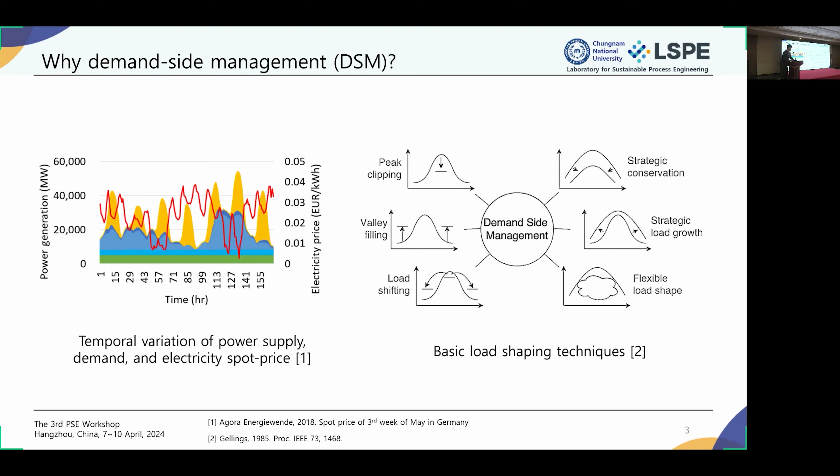For instance, during the time when the demand is high, some players in the power exchange market could reduce their power demand, or they could shift their demand to the period when the demand is not really much. There are also different types of strategies to employ the DSM.

So there are two representative cases where the DSM could be beneficial. The first one takes place in the balancing market. I took this figure from this website, where the gauge indicates the current frequency of the European power grid. It should stay around 50 Hertz, as many of you already know. But if there is more demand or less demand, then this arrow moves up and down.

So in order to avoid much deviation from our standard level, someone needs to reduce their power load, or someone needs to increase their power generation, or vice versa. So if you participate in this balancing market, by increasing or decreasing your demand, you can take the financial incentive because you contribute to the stability of the power grid.

That's one opportunity. Another opportunity takes place in the spot market. This is a process flow diagram of an air separation unit, which is the most representative system in the case of the application of DSM. There is a main compressor that pressurizes air in order to separate it into nitrogen and oxygen. It consumes a huge amount of electricity in the industrial sector.

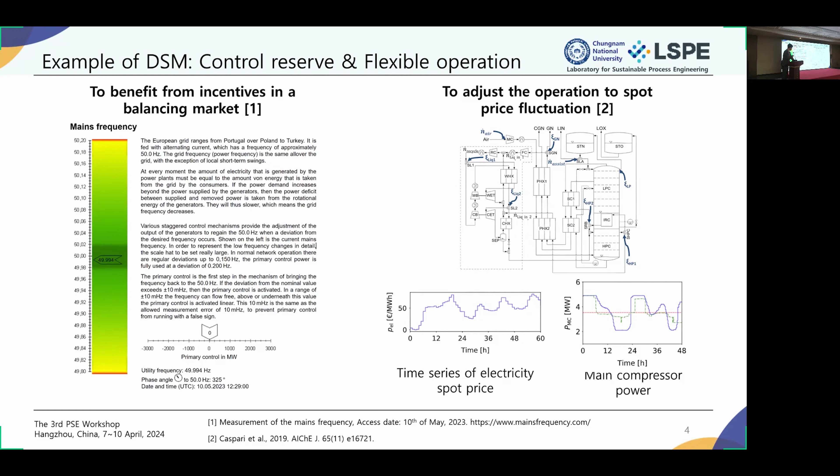On top of that, in academia at least, many people have tried to apply this DSM to various industrial plants, such as the air separation unit I already introduced. Also chlor-alkali electrolysis is another representative kind of toy problem that has been investigated. Also, some investigated the application of DSM to desalination plants that change seawater to drinkable water. Also, the carbon capture plant was another interesting target for the DSM study, mostly led by researchers in Norway.

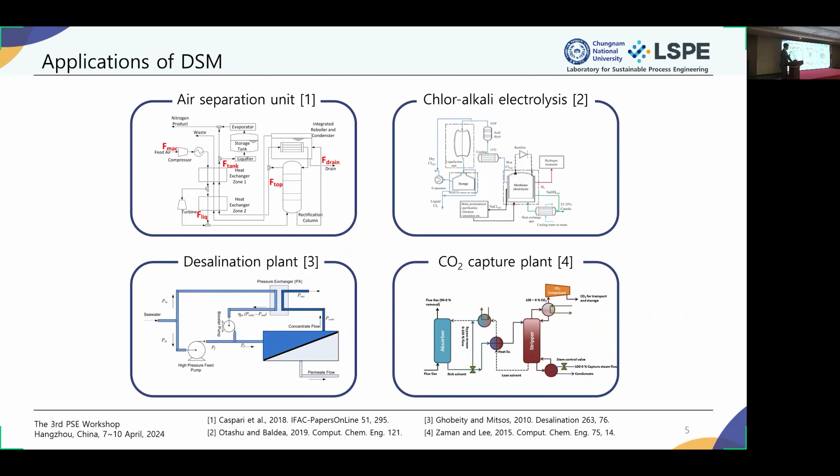Today's talk is mostly about the application of DSM strategy to three different electrolysis-based systems. The first is not just a simple chlor-alkali electrolysis, but one that employs switchability between two different operational modes. The second is an electrochemical CO2 reduction system that converts CO2 into valuable chemical products. The third is water electrolysis that produces hydrogen, but this is a really practical problem. Let me introduce these case studies one by one.

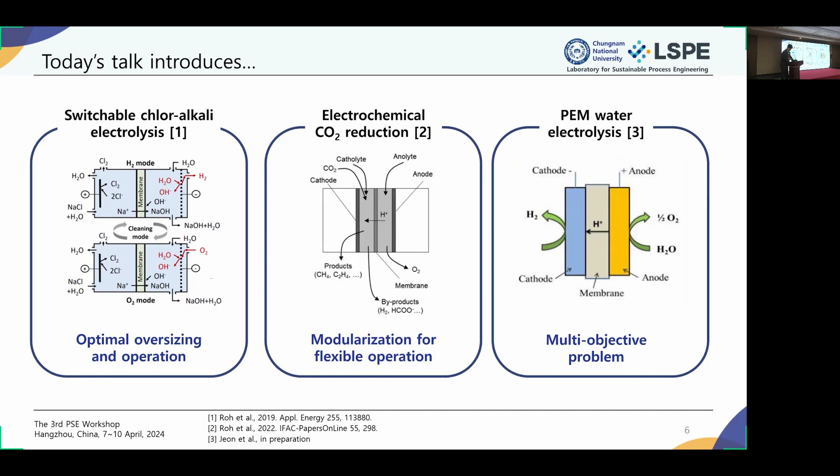This first work was done in collaboration with Professor Mitsos and also the industrial partner Covestro, when I did my PhD postdoc in Aachen.

Looking at this slide, the conventional chlor-alkali electrolysis is based on this scheme. It decomposes brine into chlorine gas, sodium hydroxide, and hydrogen as a byproduct when you apply around 3 volts of cell potential to this electrolyzer. This is the conventional way of making these chemical compounds.

As an alternative, we could also replace the cathode side with an oxygen-depolarized cathode. Then, with reduced cell potential around 2 volts, we can produce the same amount of chlorine and sodium hydroxide. But the difference is that we need to supply extra oxygen as raw material, and we don't have the hydrogen byproduct anymore. Looking at this graph, for the same amount of chlorine production, the conventional or hydrogen mode consumes around 33% more electricity than the oxygen mode.

My German industrial partner invented a novel cathode that employs bifunctionality, allowing us to operate this electrolyzer in both modes.

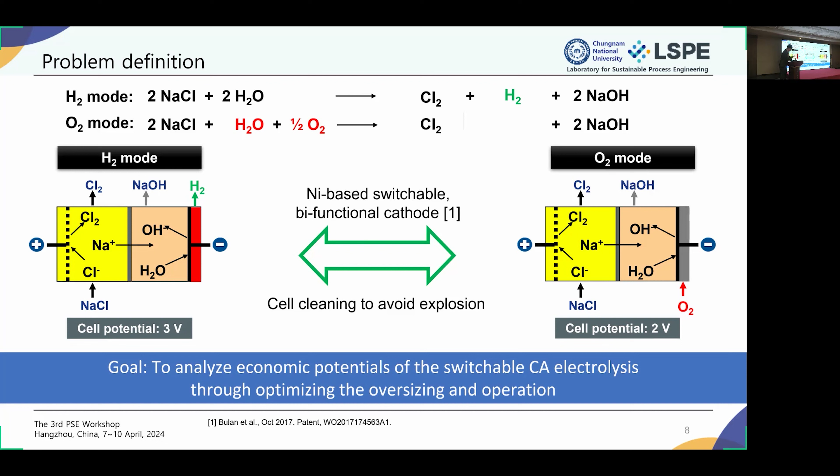So our goal for this program is to analyze the economic potential of this switchable chlor-alkali electrolysis through optimizing both the oversizing factor and the operation. It's kind of an integrated problem.

This slide illustrates how this concept operates. The electrolyzer can operate in one of three modes. If you want to change your operation mode from hydrogen mode to oxygen mode, we need to shut down our electrolyzer first and clean up with nitrogen gas, because in the cathode chamber, if you don't do that, oxygen and hydrogen meet each other and it may cause an explosion.

The industrial people never want such an occasion, so that's why we need to stop by at this clean mode. That may take less than 45 minutes.

We should also have a chlorine storage tank, because we need to guarantee a constant supply of chlorine to the downstream process. These downstream operators aren't interested in what we're doing upstream; they always require a stable supply of the intermediate products.

But the thing is, chlorine gas is a really dangerous gas. Therefore, the capacity of the chlorine gas storage is legally limited. The maximum duration for storage of chlorine is around 3 hours, according to my industrial partner.

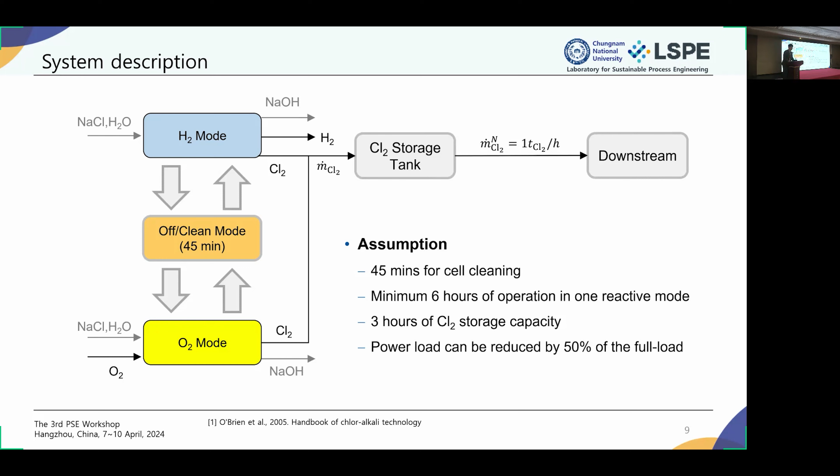So I formulated an optimization problem. Our goal is to minimize this hourly production cost, which is the sum of the operating cost saving and additional depreciation cost. The operating cost includes the cost of electricity and oxygen, and also the credit from the hydrogen byproduct. This next part is important, that's why I put an underline here.

Depreciation cost: in order to employ this switching operation, we are not able to do so with an existing chlor-alkali electrolyzer. We should do some retrofit, and that causes extra cost, which needs to be included in this objective function. So there's no free lunch.

There are many constraints, some highlighted with underlines. These transition constraints are really important. They include some binary variables, and also this production rate limit is influenced by the oversizing factor alpha. Here, alpha is an optimization variable too, which is independent of time, because as I told you at the beginning, my goal is to simultaneously optimize the oversizing and the operation.

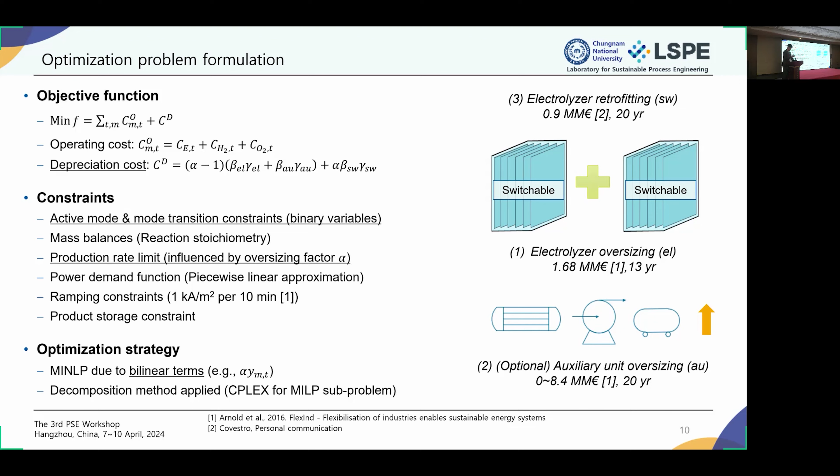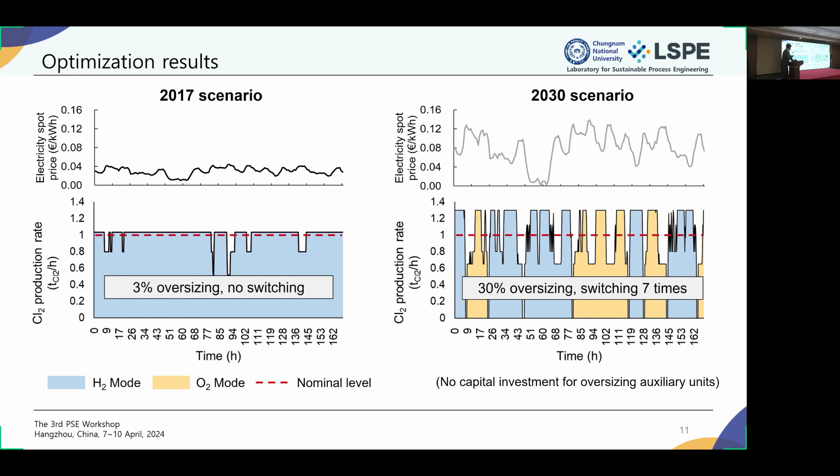Also, a bigger oversizing is found compared to the 2017 case. Then the question is whether this is really beneficial if we consider both operating savings and additional depreciation.

So I created two extreme cases. The first only requires the minimum cost for retrofitting the electrolyzer itself. The other extreme case is different: on top of the electrolyzer, we need additional cost to enlarge the capacity of the auxiliary units around it, because sometimes we want to increase production level, which requires additional capacity.

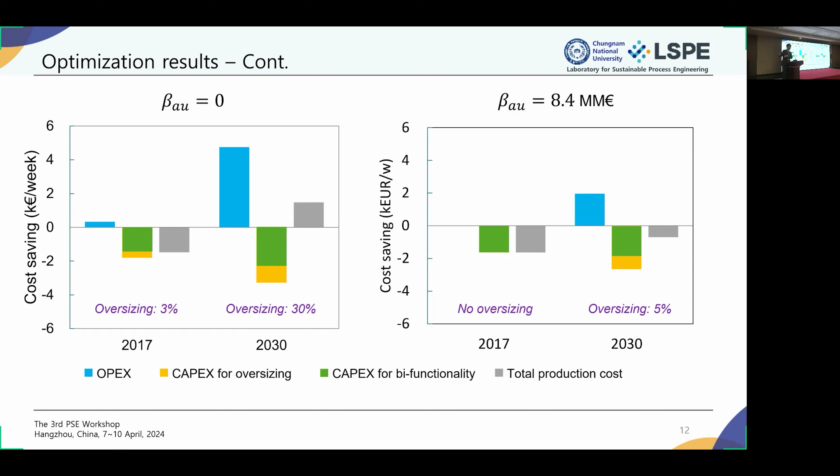Okay, now let me move on to the next case study. This one was done in collaboration with Professor Mitsos.

This one is a fairly new technology compared to chloralkali electrolysis, which is really traditional. This electrochemical reduction technology is still at very low TRL—I would say around TRL level 2 to 4.

The basic principle is that we reduce carbon dioxide by utilizing, hopefully, renewable electricity to produce valuable chemicals such as carbon monoxide, formic acid, ethylene, or ethanol.

But the problem with this technology is that it's too expensive, because of expensive materials and expensive equipment, but the biggest cost driver is the power cost—electricity cost—because of the huge overpotential.

There might be several solutions to overcome these challenges, but one of my solutions is to apply demand side management to this novel technology. Why? If we can adjust the production level of this new system to the fluctuation of electricity price, we could expect some financial benefit. But here are some challenges.

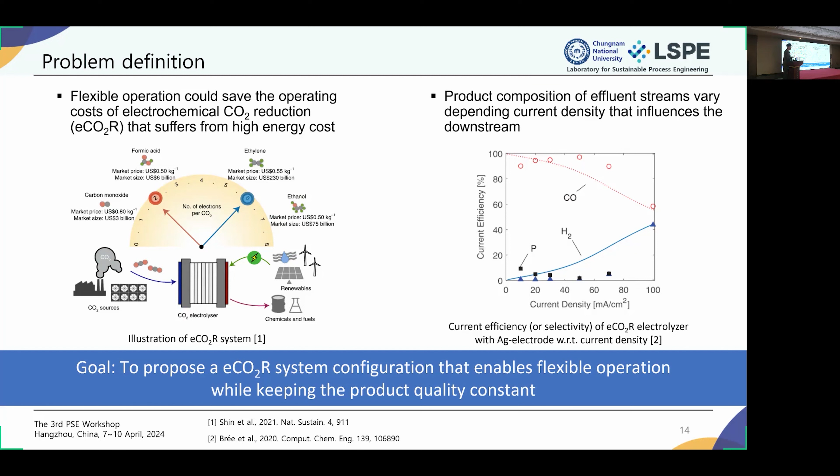So the goal of this case study is to propose an eCO2R system configuration that enables flexible operation while keeping the product quality constant. That was our problem.

Here's the basic idea: we modularized this eCO2R system. This idea was motivated by a conventional problem in industrial engineering called the parallel machine scheduling problem.

This problem involves an n number of identical machines. How should we allocate jobs to these identical machines? So we propose this concept of system configuration.

We divide the whole electrolysis system into small modules and make individual decisions. In this case, one module could produce a different amount of syngas than the others, but we impose a constraint that the composition of this mixed stream should always satisfy our product quality constraint. So while the product quality stays at a constant level, the total flow rate could differ.

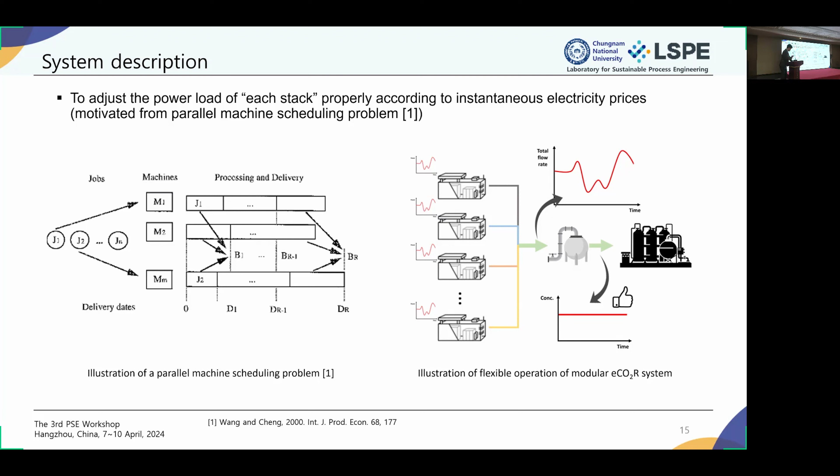Here is a schematic diagram of this modular eCO2R system. We supply carbon dioxide and water, and there are n number of sub-modules comprised of an electrolyzer and a CO2 separation unit that recycles the unreacted CO2. Then we put them together, with a storage tank that stores the products and guarantees constant supply to the downstream process.

In this case study, we consider a simplified reaction stoichiometry that produces hydrogen and carbon monoxide with a hydrogen-to-carbon-monoxide molar ratio equal to 1, suitable for Fischer-Tropsch synthesis. We also introduce several conditions that characterize the oversizing, number of stacks, time horizon, and so on.

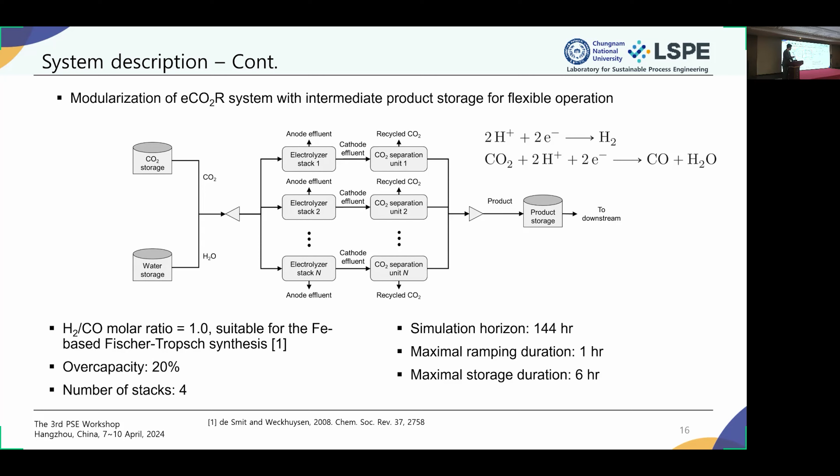So there are some key assumptions. For instance, we assume that there is no side product, and also unreacted CO2 is completely removed. And also we only consider the power demand for the electrolyzer only, because that's the major energy consumer.

Our objective is to minimize the power cost for the given time horizon. There are several constraints that should be included, and I'd like to direct your attention to the first two constraints, which are nonlinear functions. Typically when you solve the scheduling problem, we linearize the nonlinear functions.

But this time we try to solve the nonlinear scheduling problem as it is, to guarantee the accuracy of the solutions. Also, in order to avoid alternative solutions that arise from this parallel machine scheduling problem, we add a symmetry breaking constraint. And to solve this nonlinear scheduling program, we apply a wavelet-based grid adaptation algorithm, proposed by Professor Mitsos, to gain near optimal solutions. This problem was implemented in MAiNGO, our in-house deterministic global optimization solver.

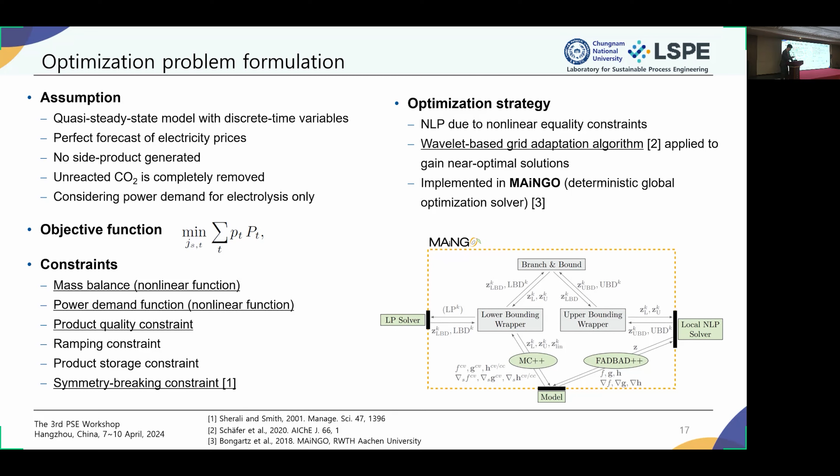So we found that we could save around 4.27% of the power cost.

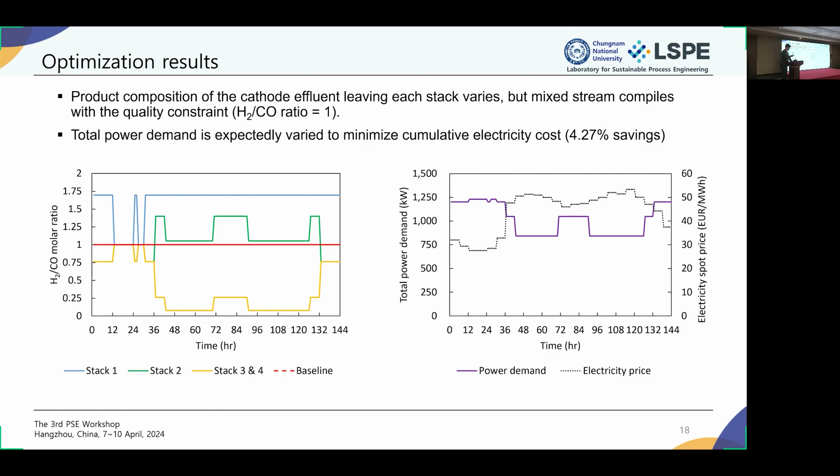There's also the issue regarding the CO2 recovery unit. If you recover CO2 using amine scrubbing, that unit is dynamically not fast. But if you use pressure swing adsorption or membrane, such a unit is more agile. So by assuming different maximum ramping durations for each module, we found that the savings in operating cost could be different.

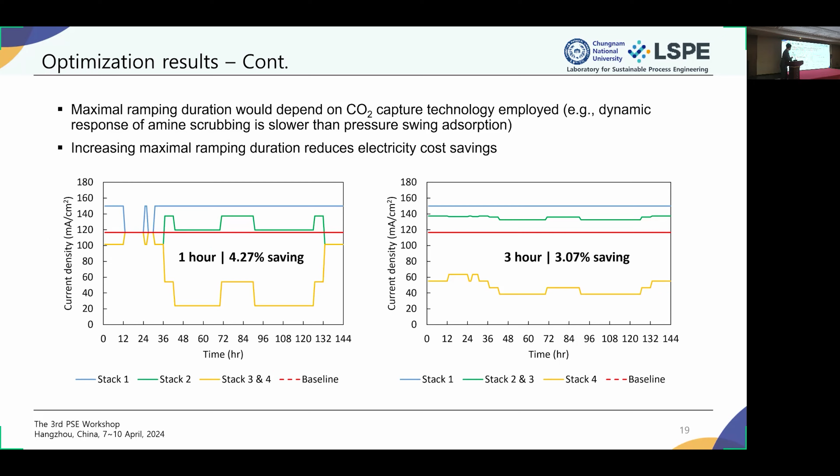This is the end of the second case study, let me move fast to cover the third case study. This case study is about South Korea. There is the biggest island, called Jeju, in the southern part of South Korea. It's a very beautiful place, and it has a huge, plentiful amount of solar and wind energy.

In this island, the price of electricity changes frequently, and the hourly carbon footprint of this island changes all the time. In the morning and afternoon, the hourly greenhouse gas emission factor decreases because of solar energy generation.

If we calculate this emission factor based on the 2022 data, it comes to 0.2662 tons of CO2 equivalent per kilowatt hour, which is just about 60% of the emission factor in the mainland. Also, the amount of curtailed electricity on this island is increasing. In 2021, the cumulative curtailment was 12 gigawatt hours, but it's growing.

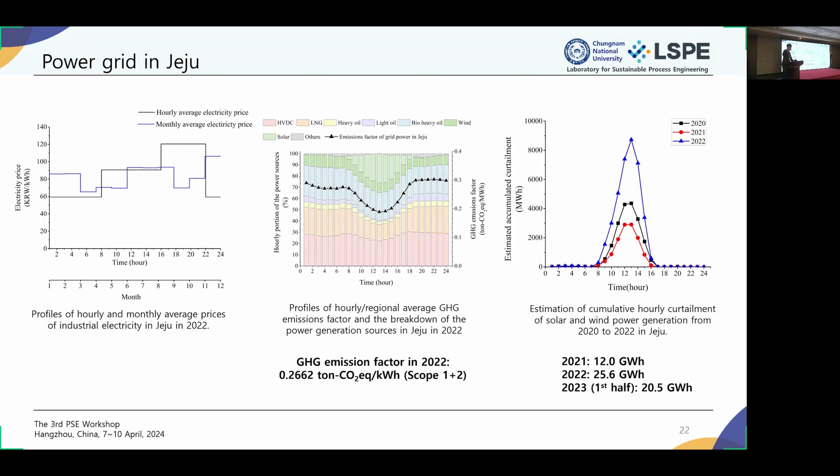Do you think this is feasible? Maybe not—if you are aware of how much electricity is needed to produce hydrogen through water electrolysis, and also if you are aware that this emission factor number is not low enough to reach green or clean hydrogen status.

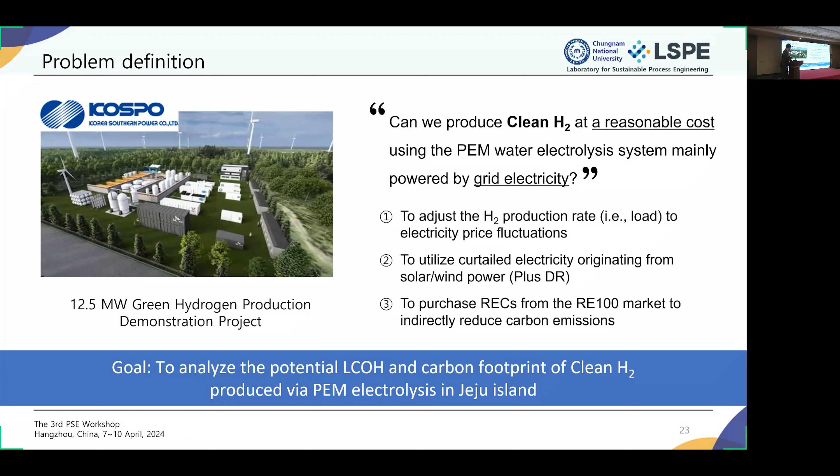Anyway, in order to achieve this goal, we introduced 3 different strategies: flexible operation, using the curtailed electricity, and purchasing credits from the renewable electricity 100 market. So we formulated an optimization problem considering all 3 solutions to minimize the levelized cost of hydrogen.

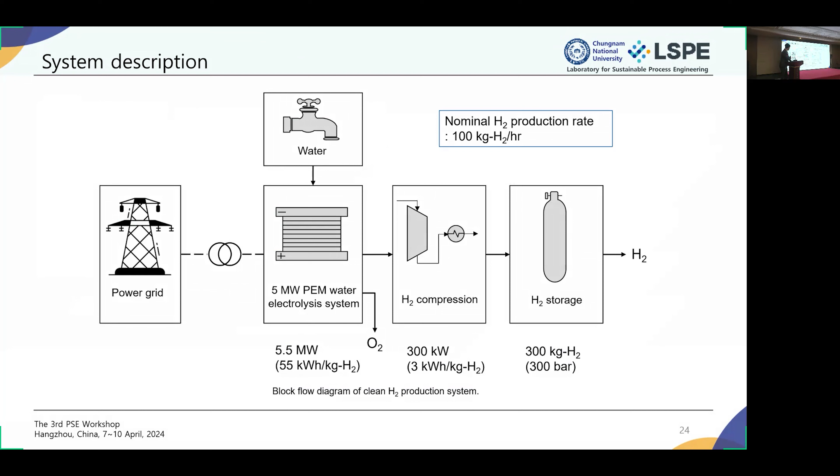This is a simplified schematic diagram of the water electrolysis system. It's not very special, but it's mainly powered by connection to the power grid. Here is the optimization problem—not special, it's an LP problem—but we calculated the effective carbon footprint, considering the hourly data of power trading in Jeju island.

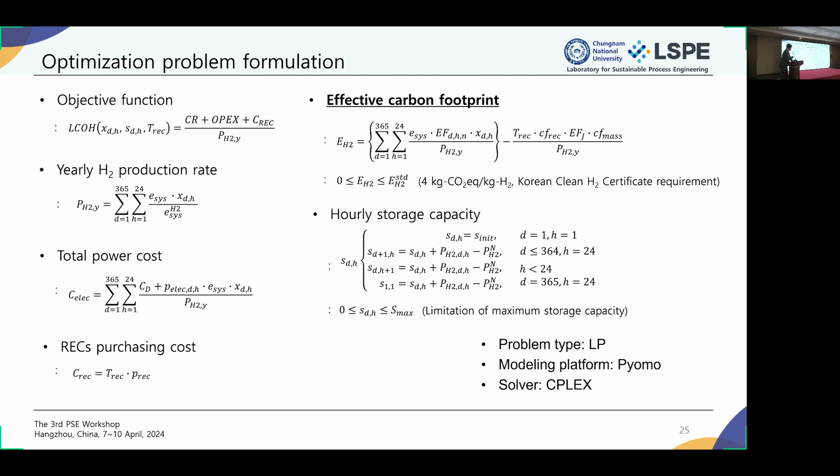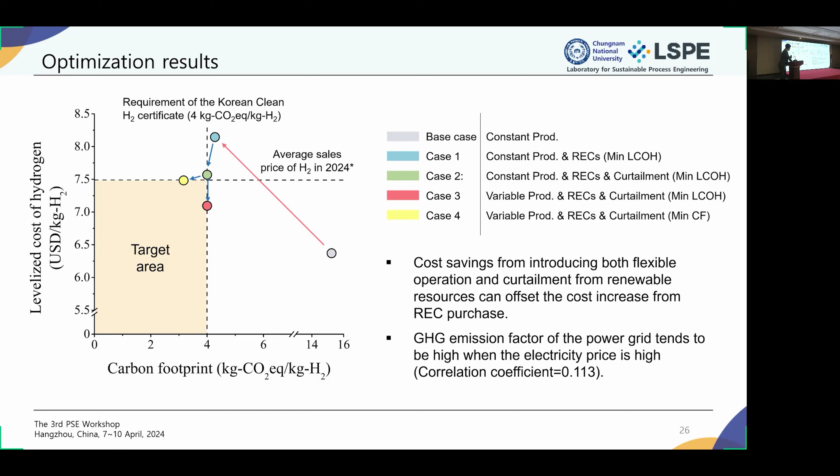By applying these three strategies, starting from this point, we could go up or go down, and we find two economical and environmental solutions that are very close to this target area. If the share of renewable resources in Jeju Island increases in the future, we believe these 2 points will move into the middle of this region.